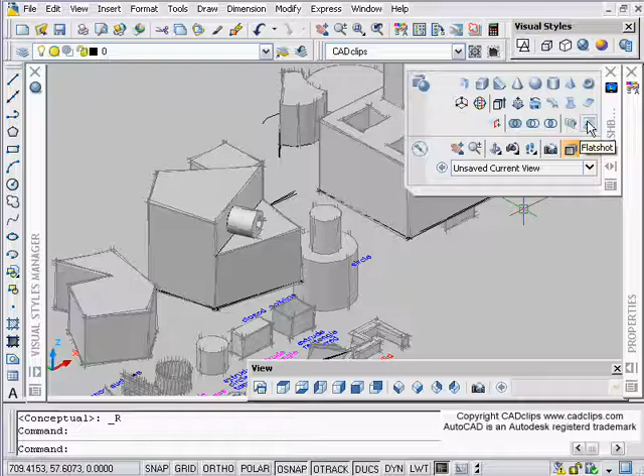We're talking about Flatshot over here on our dashboard, and I'm using the 3D Make panel. If you can't see this, you can right click here and see the different control panels. So right down here in the corner, working our way around, Flatshot - a very basic command.

What it does is take a snapshot of all the visible 3D solids, excluding text and 2D objects, and creates a block of that view, a 2D block of whatever view you're currently looking at.

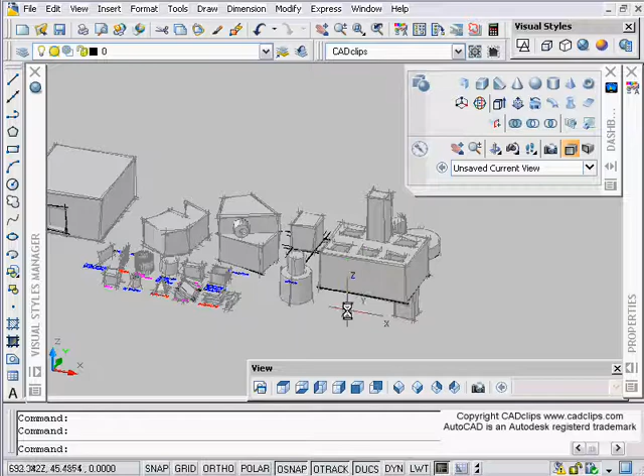If I use shift middle mouse and go over to here, I can get a 2D snapshot, flatshot view of this. It grabs all the objects - it doesn't let you select the objects, it grabs whatever is visible and uses those objects. So it doesn't really matter how zoomed in I am when I do this. I might as well be zoomed out.

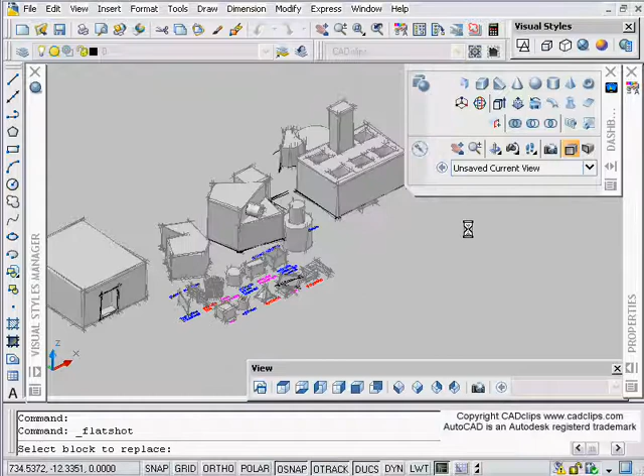I can start the command - very basic. Insert as a new block. If you say replace existing block, you don't get a pick list, you just have to pick a block and it'll replace it. We're going to do that later. You can also export it more or less like a W block and pick a file and a name.

Foreground color, you can pick the line work - we'll see this, I'll leave this at blue for now. The foreground lines, meaning the lines that are not obscured, are going to be continuous. Then for obscured lines, the lines hidden behind over here, do you want to show them or not? And if you do want to show them, what line type and what color do you want to use?

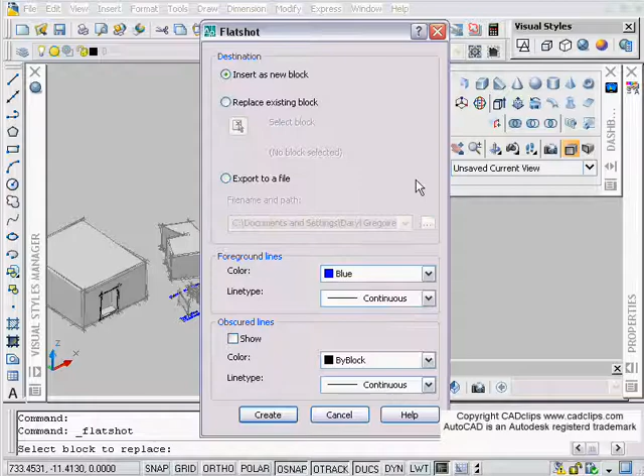So we'll go through this a couple of times. First time through, I'm going to say don't show obscured lines, foreground lines are blue. I'm going to say insert as a new block and hit create - that's it.

Now what it's doing, down on my World UCS, is asking me for an insertion point just like a block, and I can say B for base point if I want, and then pick a point over here - in the meantime, scale, etc.

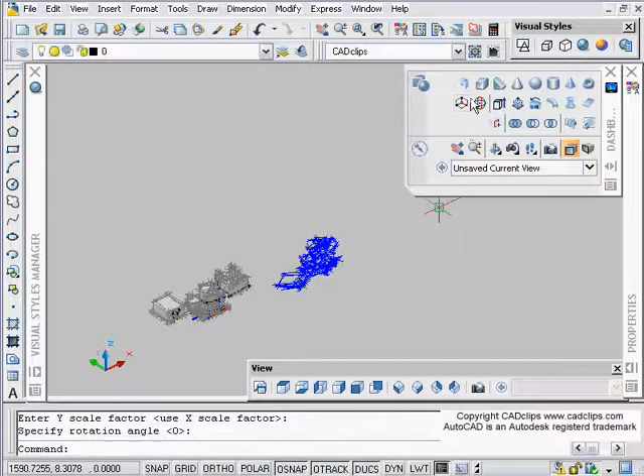Now I pick a point, enter, enter, enter, and now if I go look from the top - okay, I've created a block of that 2D view. That's all it is.

If I list it, it's going to give it an odd name, okay, and then I can use my rename tool, or I can even click on the properties and go in here probably. Can I rename it inside of here?

Okay, it's not letting me, but we can use the rename tool and say okay, rename blocks, rename this guy, and call it test 1, hit OK, and then if I list this, this is now a block.

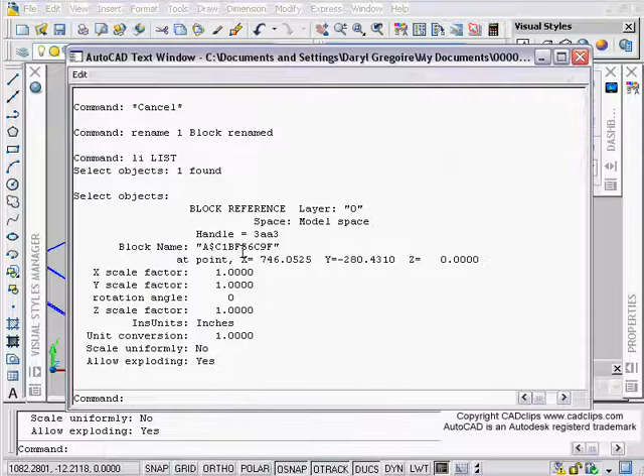Oh, wrong one - okay, no problem. Use my arrow key to bring back my rename command, grab this guy, which is why I put a 1 on it. Now if I list this, this is the block test 1, and I can W block that or do whatever I want.

Okay, now I'm going to go and look at maybe an angled view from over here.

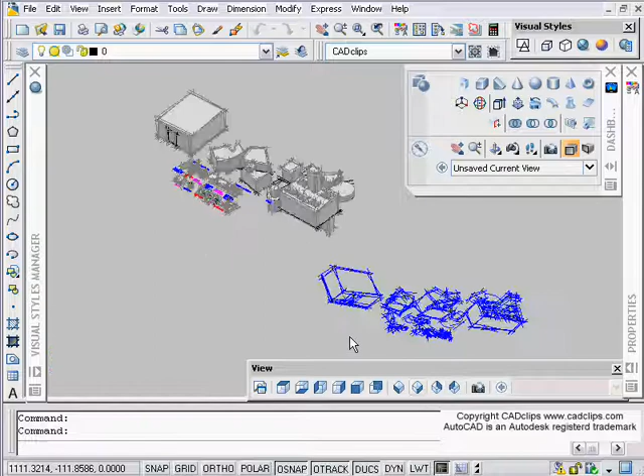Maybe I'll use one of my orbit commands, and then I'll right click and say perspective view, and now I'll get some weird, shift middle mouse, I'll get some weird perspective view and hit enter. And now I'm going to do a snapshot.

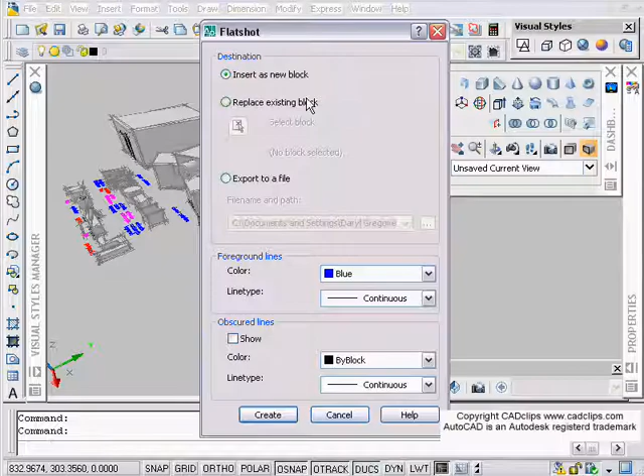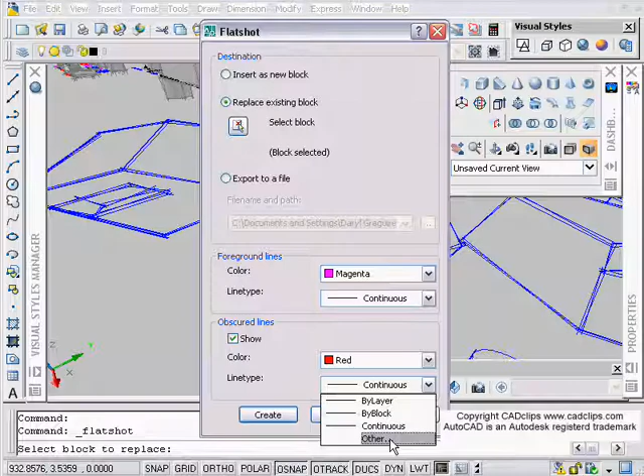I'm going to say replace existing block, click on here and zoom out and grab this guy and say replace that block. Okay, foreground color is going to be magenta. The line type is fine. I want to show obscured lines, and I want them to be the color red, and I want them to be dashed, so I hit other,

and then I'm going to go in here and do our good old load, go down to our hidden 2, hit OK, apply it, hit OK, create, and then it's done. And if I go back to my top view, now I've got a 2D block of that. Okay, now I probably want to get rid of my perspective, right, by going and starting my command.

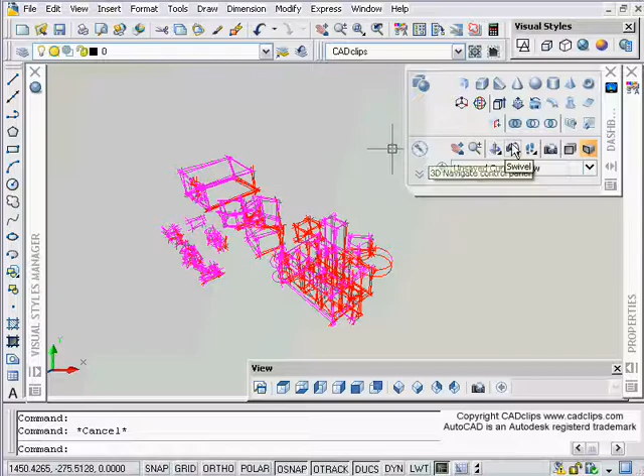Okay, now the thing is, I'm not seeing these as dash lines. I need to type my LT scale, probably change it to be 10, maybe 20. Maybe I'm going to change back to be wireframe instead. Okay, there's my top view again.

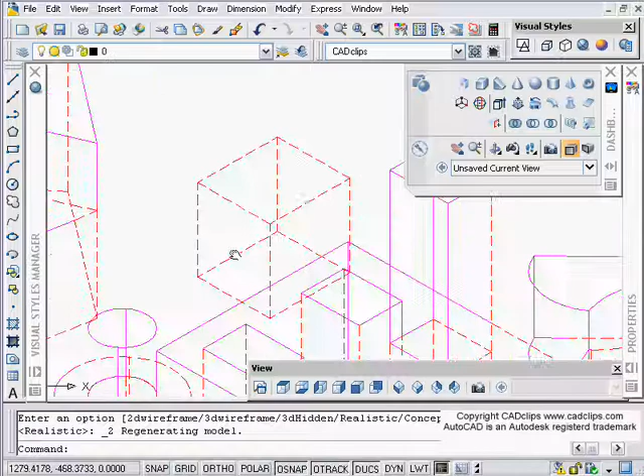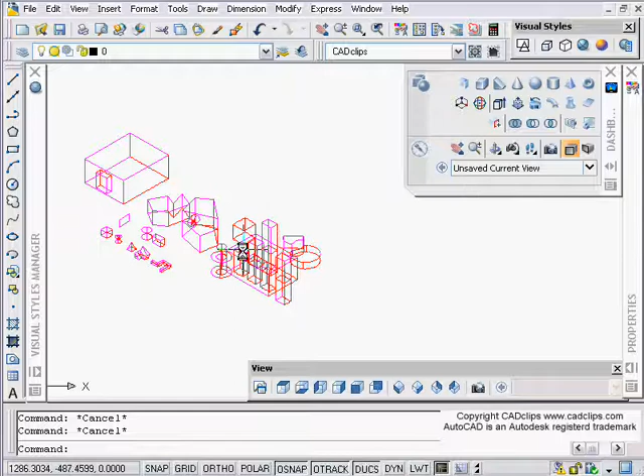This is the block I'm playing with that was created with the flatshot, and there's my dashed lines, obscured lines, okay, from that view that I created. And it appears I've lost my perspective aspect as well. Start this again. Not getting my

orbit command, but now I've got that block, and you can see that I've specified my line types, etc., based on that particular view. Doesn't look correct from over here. You have to look from the top because that's the UCS it was created in.

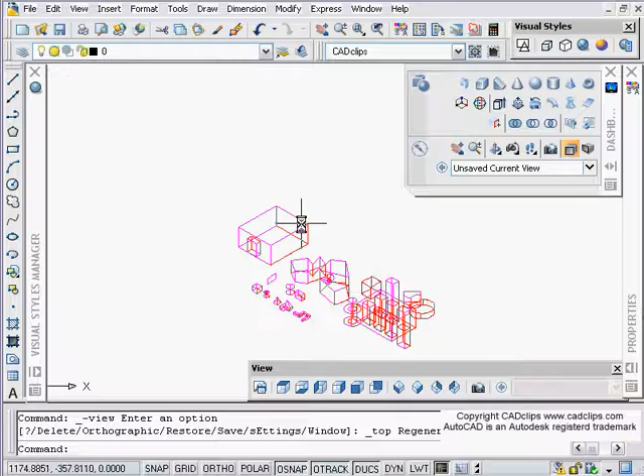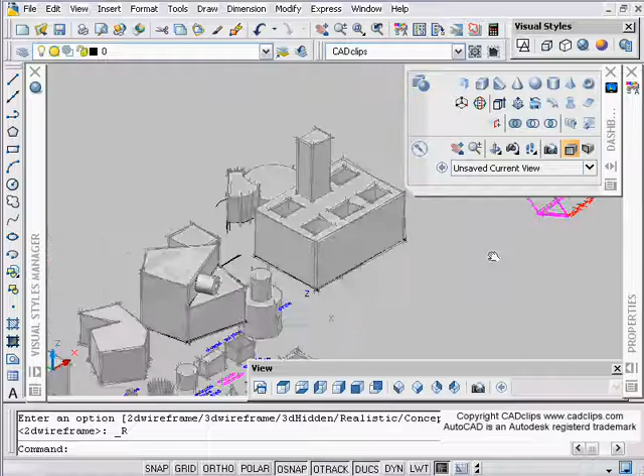Okay, and I'm wondering if I changed the wrong lines. Okay, let's try it again. Let's go to a view over here. Okay, maybe we're going to take this. You see, you can change this and it'll change this after the fact. So the realistic view will change it even if it's a block.

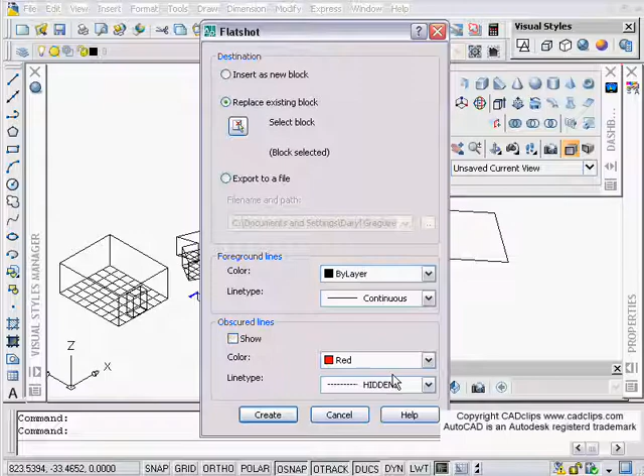Even if I draw a line right now in my conceptual view, you know, it draws lines like this, and if I change back to be wireframe, it looks like that. So it doesn't matter my conceptual view when I start my flat shot, and I'm going to say obscured lines. Let's go back to be by layer. Okay, don't show them. Okay, and yeah, that's fine.

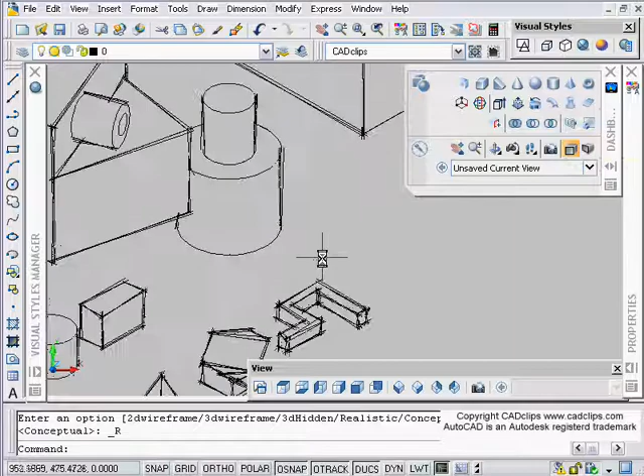Create, and then I've made a new block, inserted it, and now if I go back to my top view, there's my new flat shot block that I've created. Okay, if I change my display, that block will change accordingly, and then you can take this, W block it out, and look at it through a viewport with your paper space, or do whatever you want with it.

So what you do with that object once it's done is up to you. Depends. Some people will find there's use in this tool. Some people will find it's no use. It's great for reports and stuff, that's for sure. Okay, if you're doing reports or trying to create any sort of little capture of the 3D view for any purpose, you might start finding reasons to use this tool.

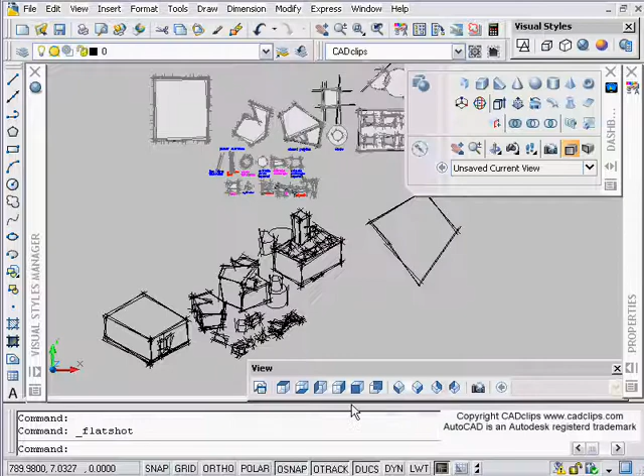So flat shot, okay, block insertion, etc., foreground, background, there's not a whole lot to it, and then it just follows your visual styles. Now will it do a wireframe? See, wireframe doesn't do it, of course, because this is just a block. So quick tool, use it and have fun with it.